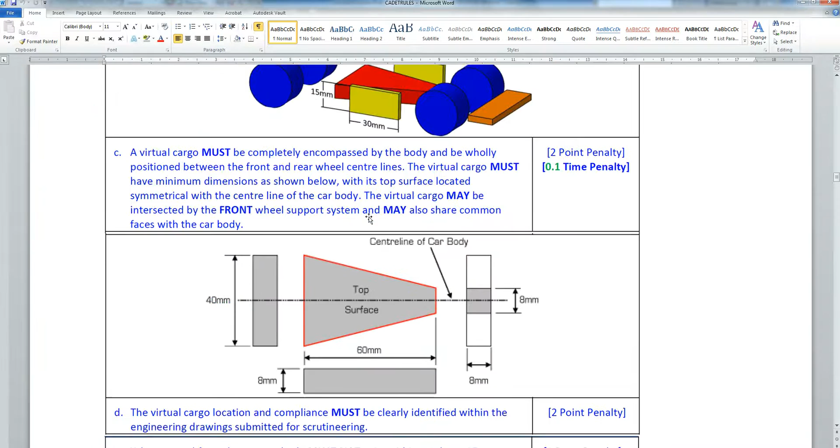Hello. This time we're back with Carcey looking at the side pod and body rules. Let's look at those rules in your document. It's section 4, it's on page 4, and there's a whole series of rules about the body. The body of the car is basically the thing that's between the front and the back wheels, which is this section in here, and the side pods are these flat regions on the side of the car.

Now the first rule here, 4A, says that the width of the side pods must be a minimum of 50 millimeters. So I see 50 millimeters in between those side pods. And part B says those side pods must project a surface of 30 by 15 millimeters. Now you need to decide for yourselves what that means, but I'll show you on the diagram what it could mean. So let's look at our car.

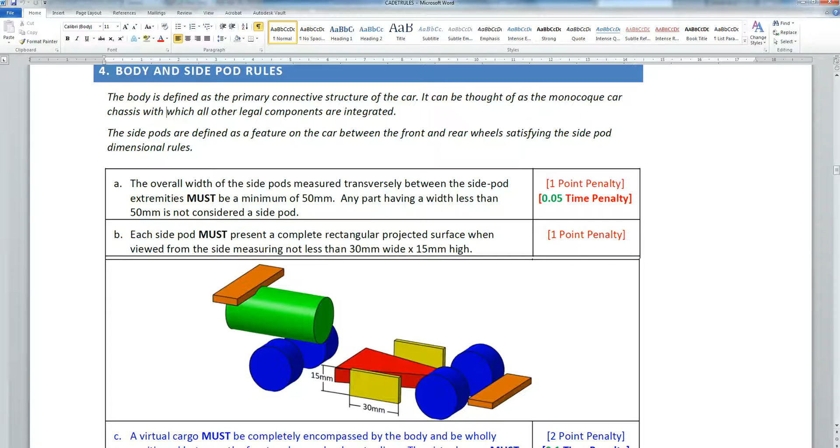Now, first of all, it's saying the width between the side pods must be 50 millimeters. Now, that's one of our side pods there, I believe. The other one's on the other side. Obviously, it needs to be 50 millimeters between them. Look at the bottom of the car. Last video, we looked at some of the rules about the minimum width of the car. It had to be bigger than 60 millimeters.

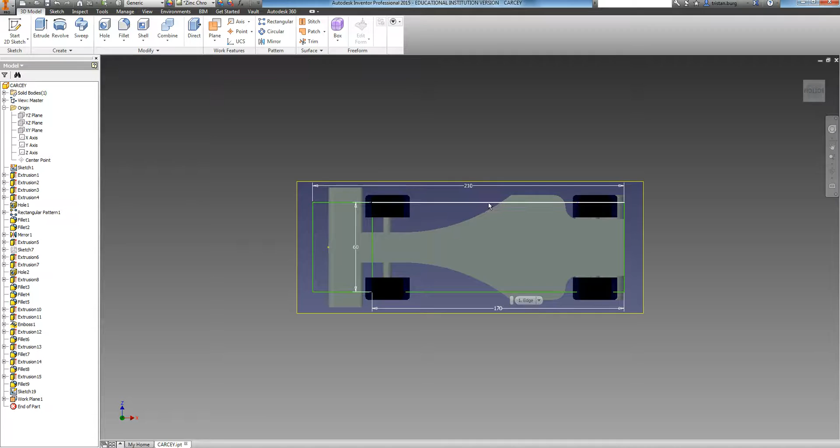And I'm pretty sure it's clear to you that if this is 60 millimeters across here, then our side pods are definitely further than 50 millimeters apart. So that's perfectly fine for our side pods. However, if you're unsure, you could always draw a 50 mm wide rectangle just to make sure that your side pods were more than 50 millimeters apart.

Let's look at the actual projected surface now. If we look at the side of the car here, I'm going to draw a little image on here. So I'm going to do a new sketch on that side pod. But I actually want to see where these side pod dimensions are. So I might go what's called project geometry up here, and I'll just click on that there so I can actually see the size of the side pod.

Now if we look at our rules, the side pod has to be projecting a surface of 30 by 15 millimeters. So let's draw a little rectangle like that. So this has got to be 30 wide, tab, 15 high, enter. So there's our rectangle. Let's press escape, then I'll highlight that so I can drag it down. And that's the projected area the side pod needs to have.

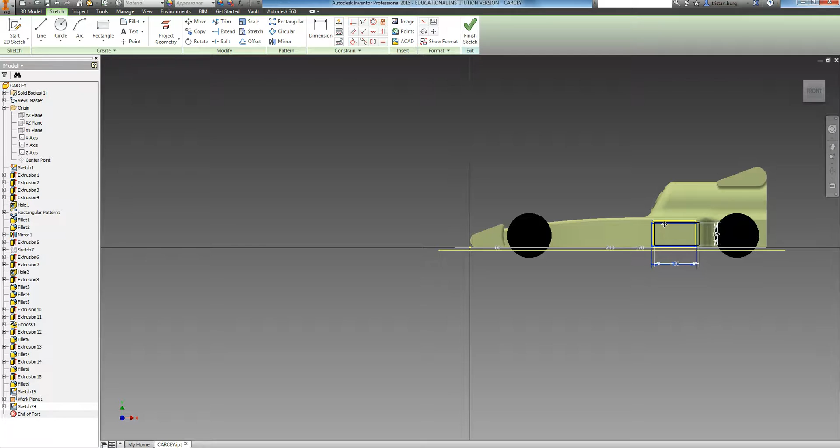Now, that actual flat surface of the side pod is not quite the right size. It's higher than it needs to be, which is fine, but it's not necessarily as wide as it needs to be. However, it says the projected surface has to be bigger than that. So if I can move that around, yeah, look. Whether you believe that projected surface goes all the way to this line just here to here, that's up for you to decide. You've got to read the rules yourselves and decide if that side pod is big enough or if it's not big enough.

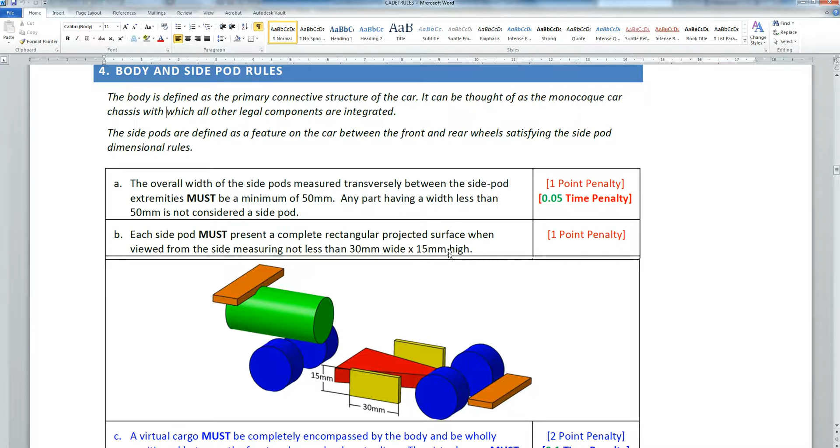So let's just check it again. It's got to be no less than 30 millimeters wide and 15 millimeters high. So you've got to decide if that's compliant or not compliant and what you're going to do about that. So let's just finish that sketch there. Let's see some more of the rules.

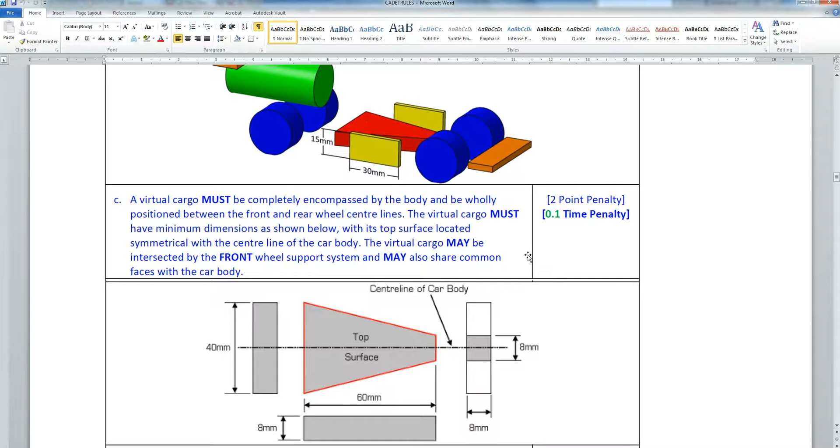Let's have a look. The next rule says there must be a virtual cargo, which is the main body of the car. There's a minimum size you need for this main body of the car. It says the dimensions must be as shown below, and it's this funny shape here. It's got to be at least 60 millimeters long, at least 40 millimeters wide at the back, at least 8 at the front, and it's got to be at least 8 millimeters tall.

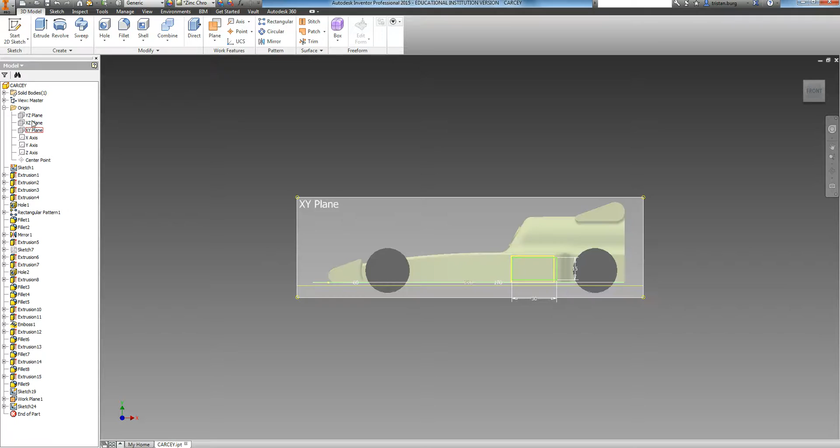So let's just check that out by drawing that on our image, and then you can check if your car is compliant. So what I might do is look at one of these planes. Let's see, it must be the XY plane. I'll look at the XY plane, then I'll do a new sketch on the XY plane. We're going to draw that shape. So I'm going to start with a line. This line is going to be, what does that have to be, 40 millimeters high.

And then there was just two curved surfaces. This one here had to be 8. And then it just joined back up to there again. The other dimension we need to worry about, well, it didn't work. Let's try that again.

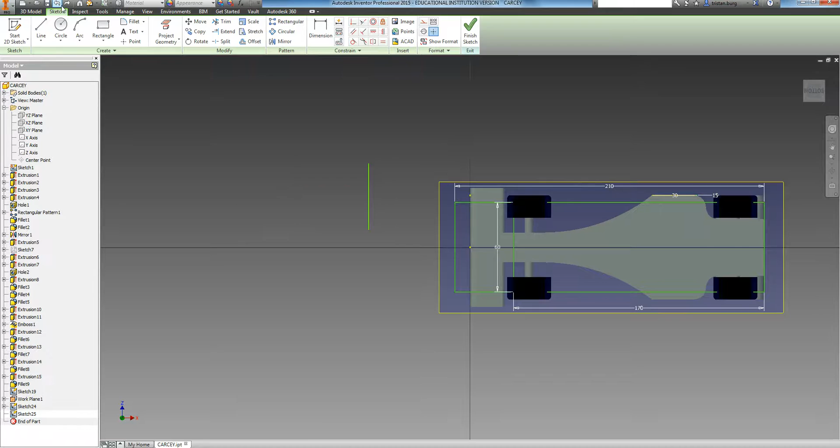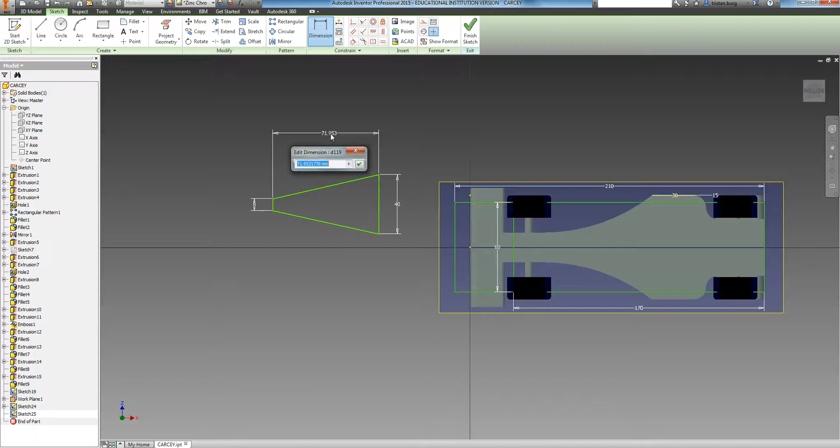Okay, so a line had to be 40 millimeters. Check. Just some angled line. A line going vertically down had to be 8 millimeters. Another line back here. So that's the basic shape. It needs a dimension though. That needed to be 60 millimeters. And because I want it to be symmetrical, I might constrain some points to be on the same line.

Let's see, what can I do for that line? Here we go, these 2 points. I'm going to make the midpoint of this line and the midpoint of that line have to be constrained to be horizontal with this axis just here. So that means that's going to stay in shape. Now we want to move that, so I'm going to press escape and highlight that.

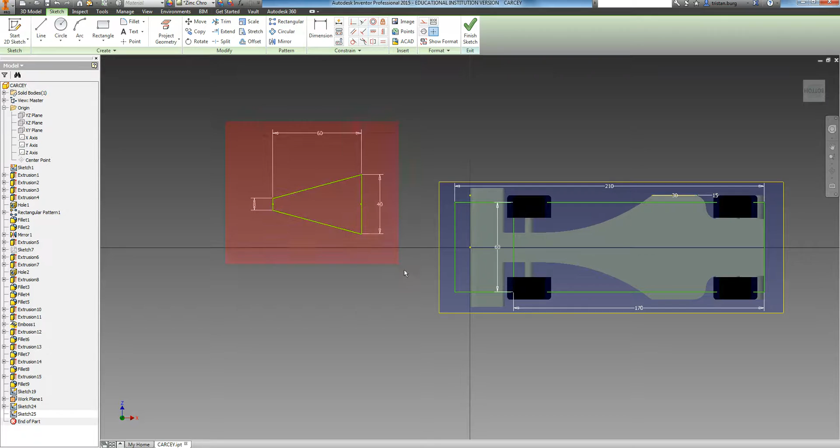This basically has to fit in the body of our car between the two wheels, and I think it's pretty clear that our car is definitely bigger than that minimum size. We could also check the height there, so let's extrude that. And I might just rotate our car around a little bit. Probably a bit too far. There we go. We want to extrude that profile. I'm pretty sure it's going upwards.

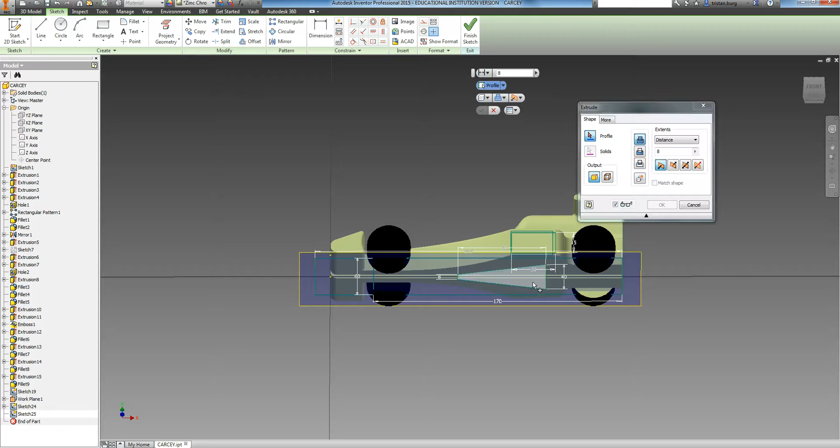It's going to be 8 minimum. Is it going to let me do that? Maybe not. Doesn't like that for some reason. Probably didn't choose an area, so let's press E for extrude, or extrude that area. It wants to go upwards, that's great, 8 millimeters, check. And let's just see, now that shape is pretty much clearly inside the car.

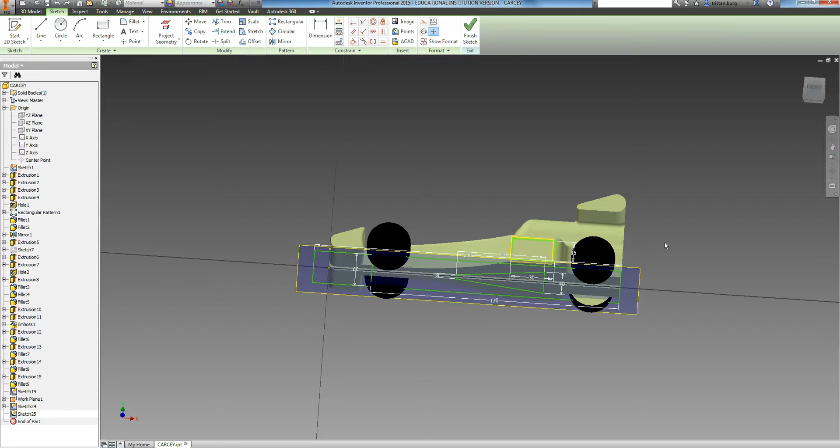I've cut it through, which is a bit silly, but you can see our car is definitely bigger than that, so I might undo that because I don't want that hole being in my car. But that just shows that our car is definitely thicker than the minimum 8 millimeters. What's our next rule we're going to look at? Next rule, check. There's an exclusion zone.

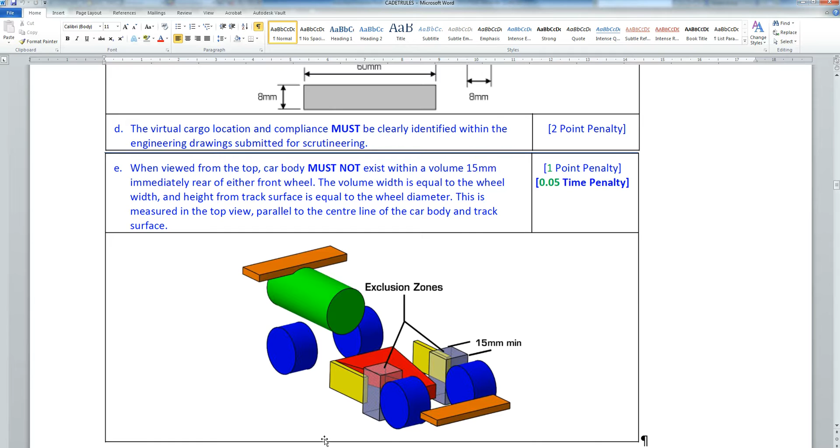So behind the front wheels is an exclusion zone, a little square of 15 by 15 millimeters where nothing can be in. So let's have a look on our image of that. So we might look at the top of our car for this one. So let's just look at the top. Okay, so directly behind the wheel there needs to be a 15 by 15 millimeter exclusion zone. So let's draw another rectangle. Let's make it 15 by 15, so it's a nice little square.

I wonder if I can project geometry. Let's project, that's that back wheel just there, so I'll put that there just so I can see where that back wheel is. I'm going to press escape again, and let's just move that down, sorry, front wheel, and I'll put that just on that line there, and I'm pretty clear there's nothing in that exclusion zone in our car on that side, and because our car's symmetrical, there'll be nothing on that side too.

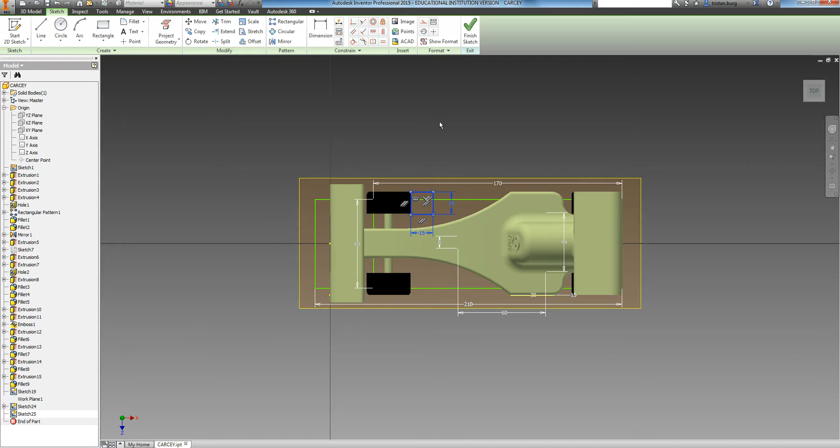So from that you can judge whether that's compliant, and if you're designing your own car, that's something else you can do to judge if your car's compliant. You can't have anything in that square behind the wheels. Let's finish that sketch off. We've got a whole lot of new little drawings on there. That's not going to change our car at all. It just means that they're going to have those little drawings in our car from now on, but we can always hide those drawings. So there are some new sketches.

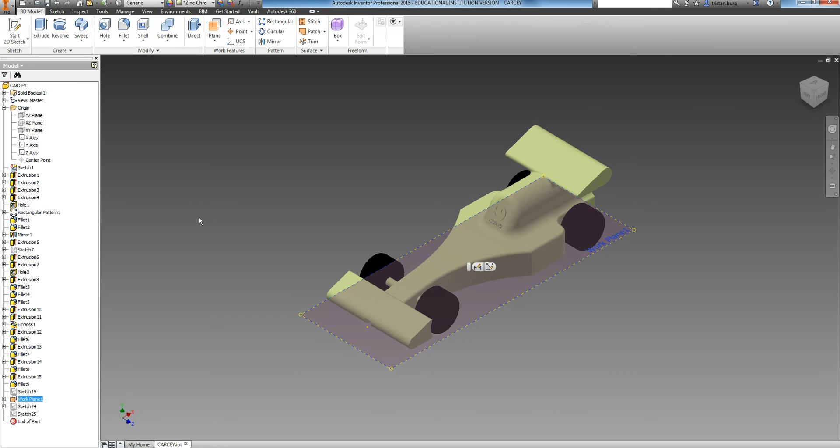We can right click and get rid of that visibility. We can right click and get rid of that visibility. And we can right click and get rid of that visibility too. So if you don't like those pictures being there, you can always right click and get rid of them. There's also this work plane, we can get rid of its visibility too if you don't like that. There we go. All our compliance drawings are still there, just we can't see them in that sketch.